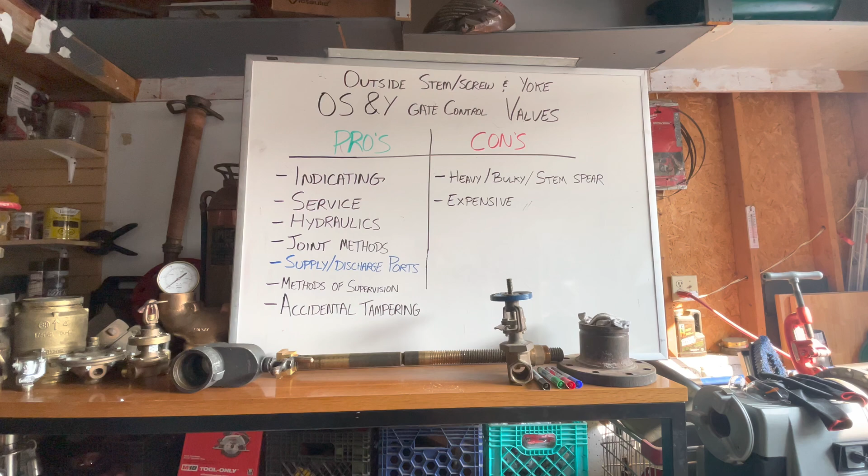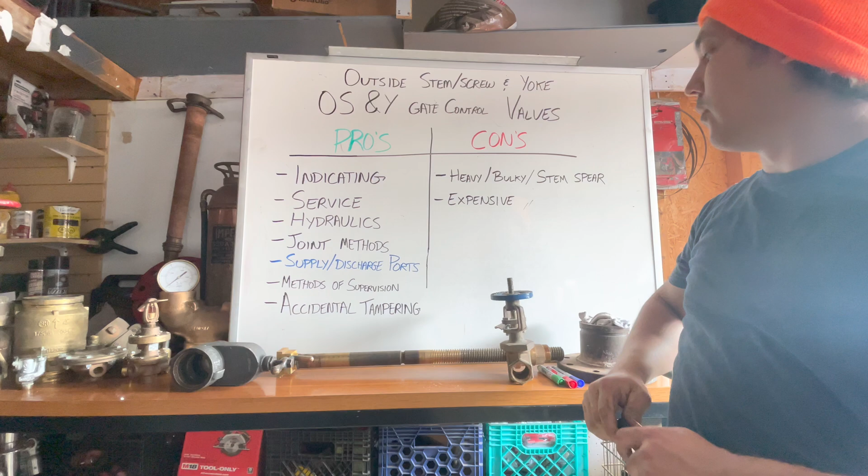So moving on, we're going to start talking about outside stem and yoke control valves. This falls under the category of a gate valve. This is a rising stem, outside screw and yoke, rising stem OS&Y gate valve.

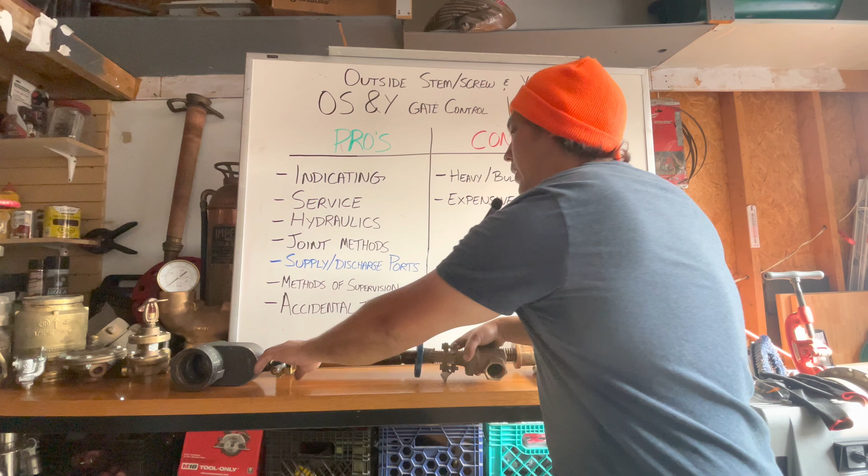And this would be a non-rising stem gate valve. So if it's not already obvious, on one of them the stem rises, and on the other one the stem stays put as it changes state.

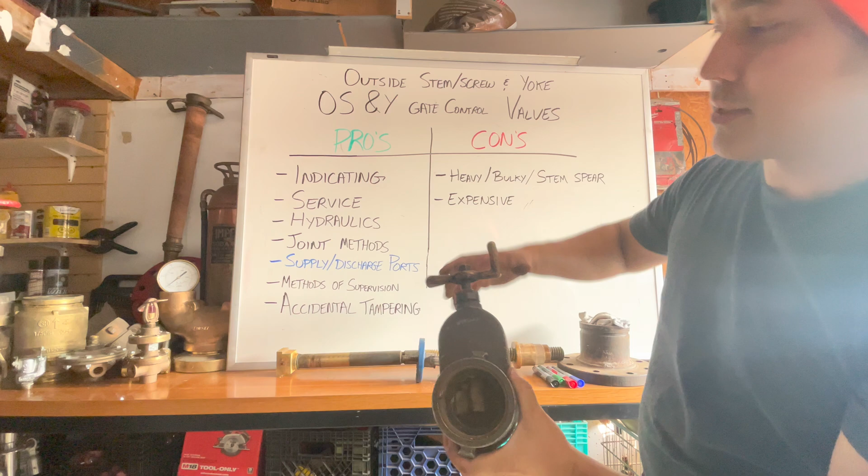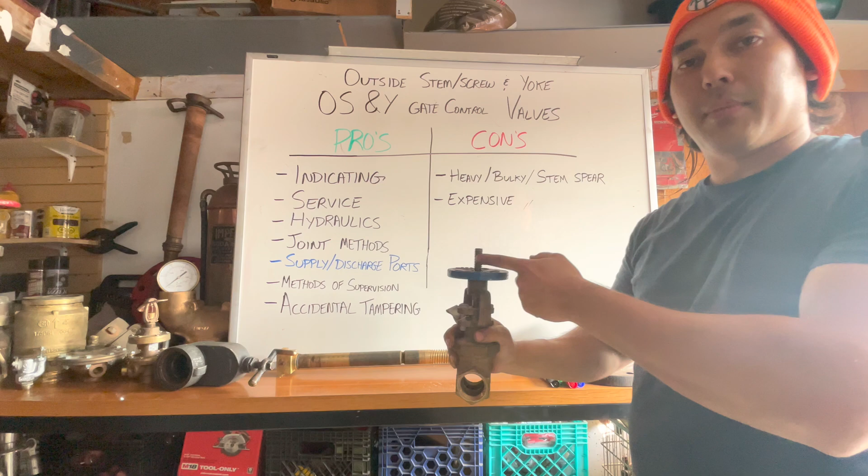I'll get onto the non-rising stem one next, but let's stick with this one for now. So one of the pros about this valve is it's indicating, and the stem is very much your indicator. You know when this valve is open, and you know at a glance when it's closed.

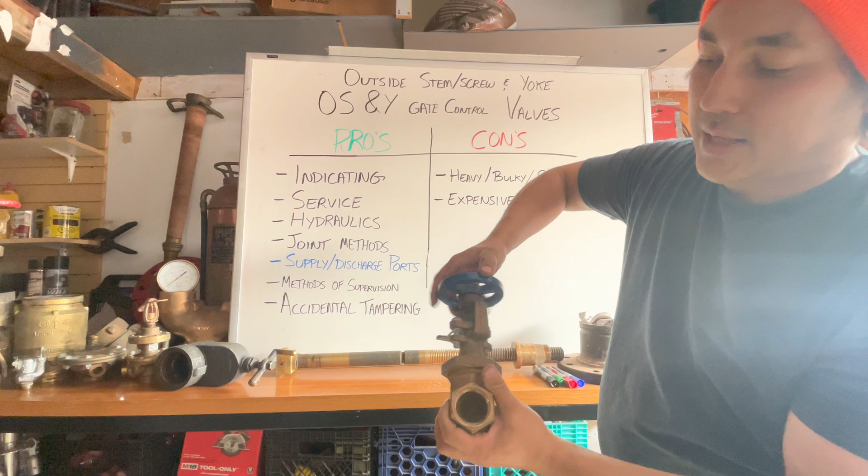When it's all the way closed, that disc comes down. I know just at a glance, I can look across the room and say, oh yeah, that OS&Y is closed right now.

So I know if it's on a sprinkler system, it better be open, unless they're using it for something like a test header. Another great pro about these is service. These are very serviceable valves.

You can take everything apart. You can service everything. You can order parts.

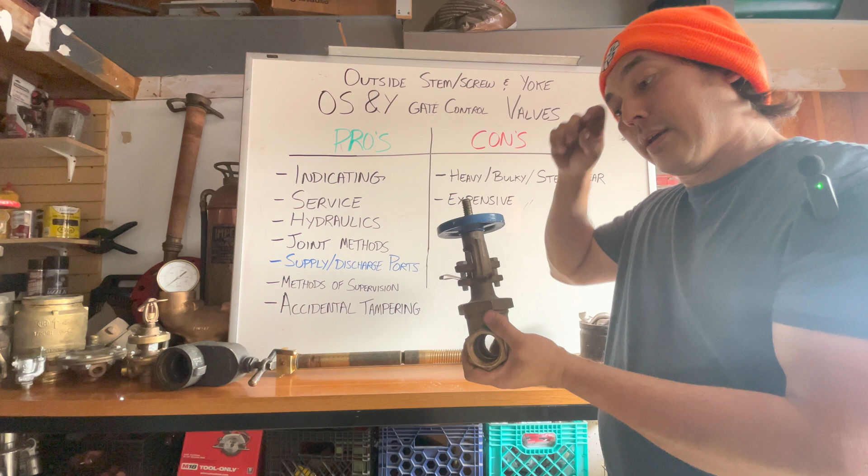So long as someone doesn't completely mash up the body and screw it up, you can take this apart and work on it. You can change the packing gland graphite or whatever you have to do if it starts leaking a little too much. Tighten her down.

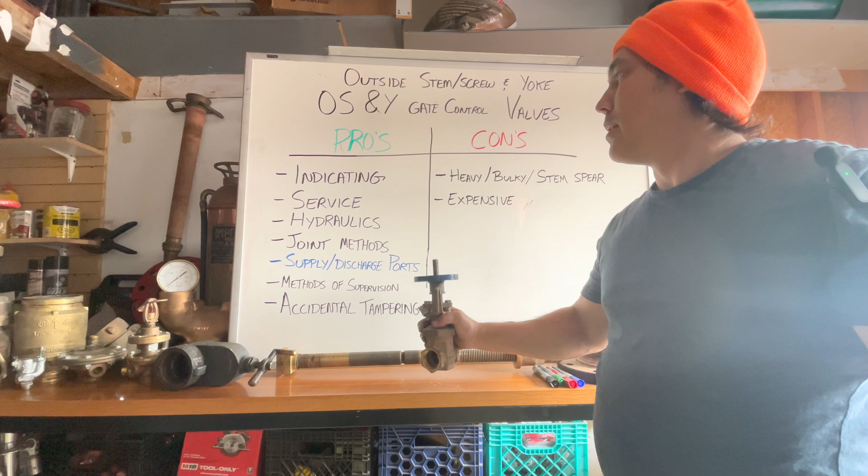They're great for service. Another good thing about them, if it's not already obvious from a wide open OS&Y, is that it's a full bore opening. So these have fantastic hydraulics, basically matched with ball valves for hydraulics.

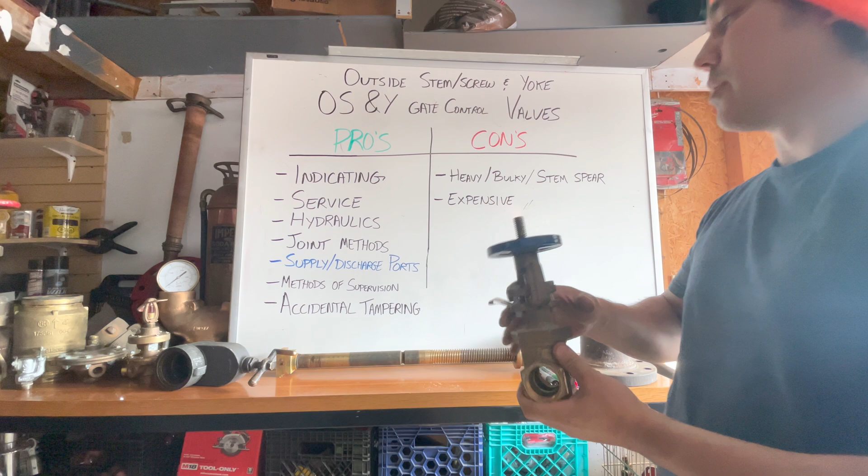Water goes straight through. Whenever you have a fire pump, this is very typical for what you'll see on the suction side, just because water is allowed to go right on through, doesn't cause any cavitation or anything like that.

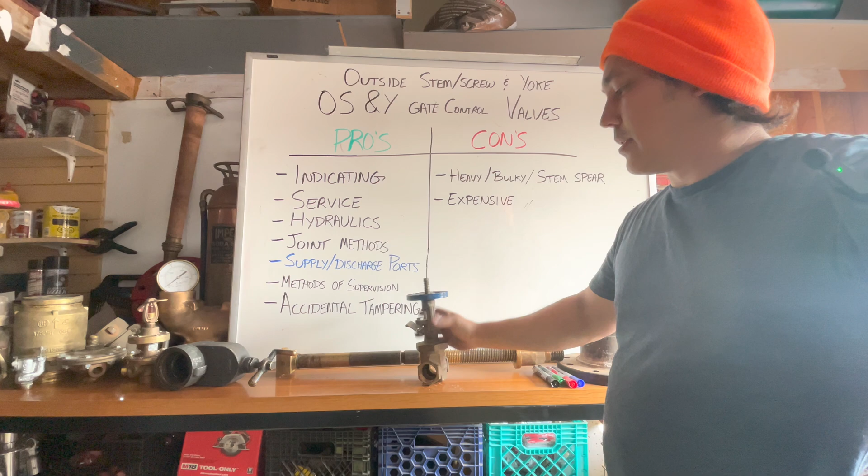Pros for joint methods, as you can see, this one's screwed. They do come in flanged as well. I'm not sure if they actually come in grooved, although I wouldn't be surprised.

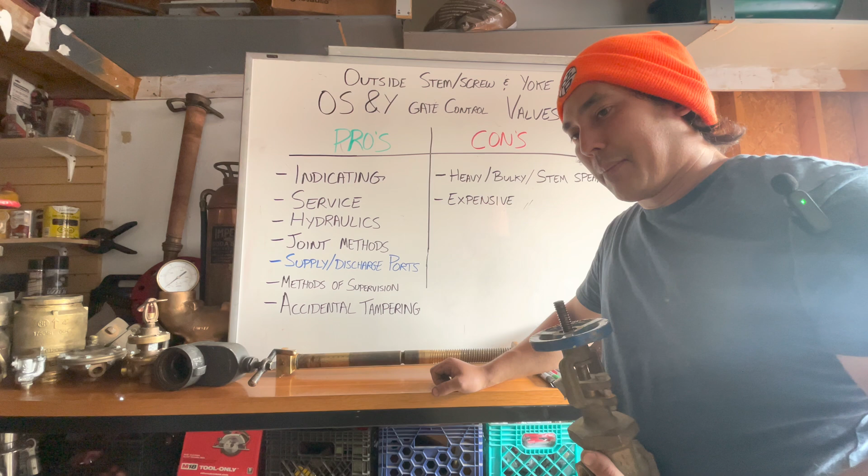I don't think I've ever installed a grooved OS&Y before, personally. I feel like if I were to see one, it would be on something like a backflow. So I actually don't know about that one, sorry, I should have done a little research on that. But there are multiple joint methods, so it's pretty decent for that.

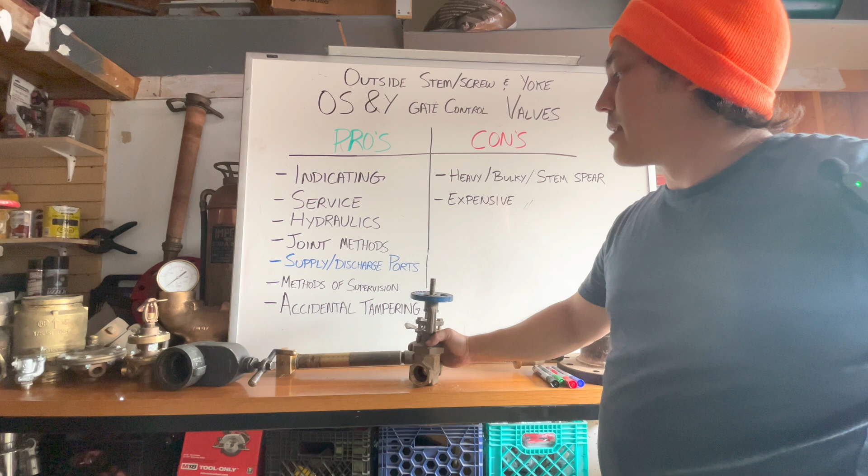I put it in blue, supply and discharge ports. This one doesn't have one, this is just 1.25 inches. I ripped this one off of a jockey pump inlet or outlet or something like that.

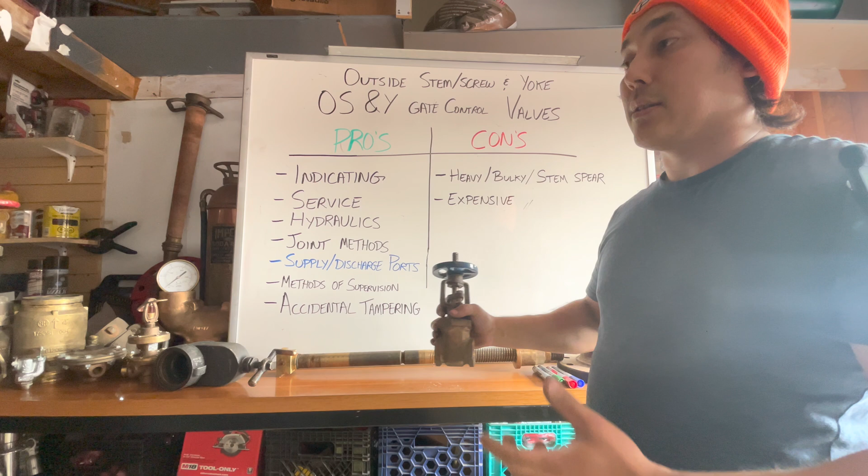But once you start getting into the larger pumps, larger OS&Ys, like 4-inch plus, maybe even 3-inch or 2.5, you could probably order them with a little 1/4-inch port or something. It is not uncommon to see ports on OS&Ys.

Which kind of puts us into that whole thing, for this one you can install it in any orientation, left or right. It's the exact same, it's identical. It doesn't matter which side's supply, which side's discharge.

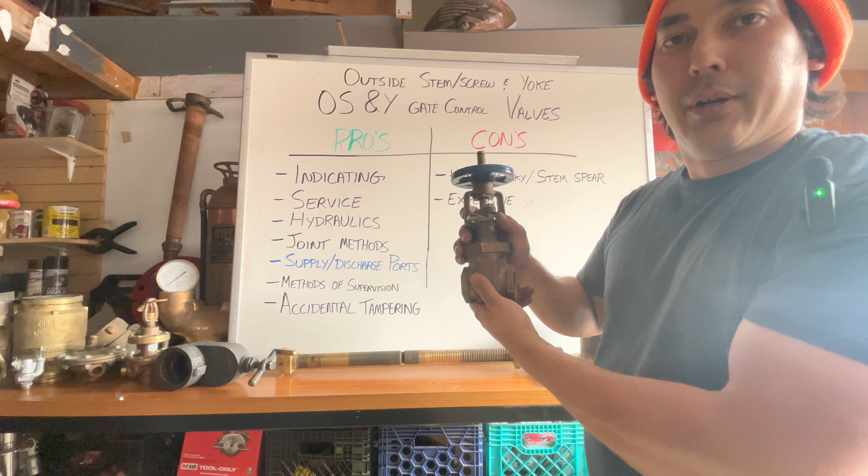However, once you start having ports involved, well, maybe you'd want to actually start installing them so that your port is on the supply side of a clapper.

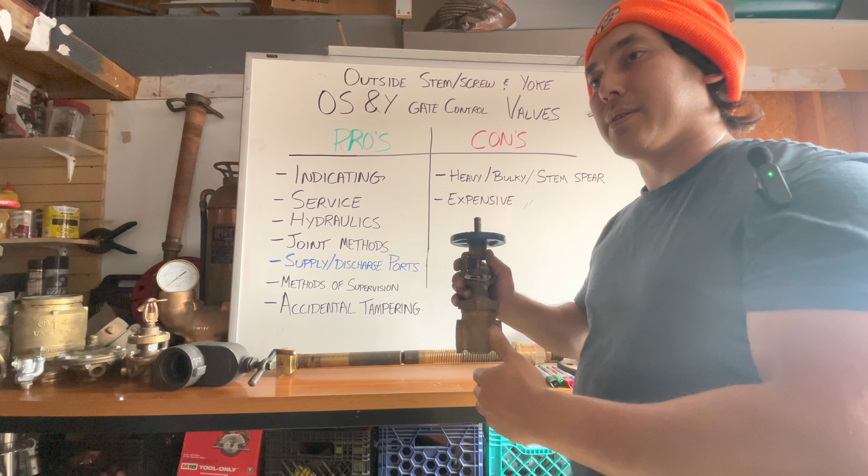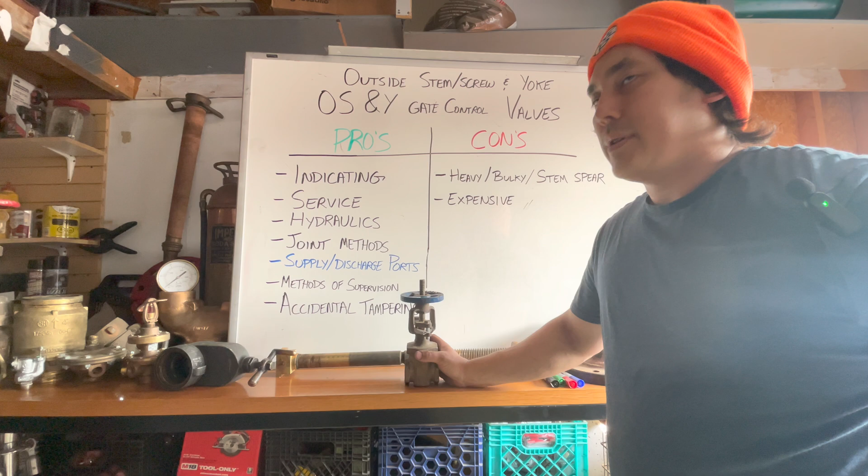So if this first OS&Y were the first valve coming into my building, like my... actually, let's not say that. Let's say we've got a backflow preventer first, and then this is my main feed shutoff valve.

So right after my backflow, they decided to add one more here, and this is probably, say for example, the feed going to the fire pump. If there is a 1-inch port, or maybe like 1.25-inch port, whatever, if there's a port on the supply side, we can use that now to feed our jockey pump.

Now we'd want to make sure that port's on the supply side. We wouldn't want it on the discharge side, because if I'm ever doing service to my fire pump and I close it, well, I've now killed that port, which is on the downstream side.

I've killed my jockey pump. So if I want to work on my fire pump, I now basically need to shut off my jockey pump in tandem with it, just because of how it was installed.

So when you have ports, it gives you a little bit of options, just a free opening, so you don't have to drill a mech tee on your supply piping or have your shop put in a weldolet or something like that. So just keep in mind, sometimes they do have them, and when they do, they're great, you can use them for stuff.

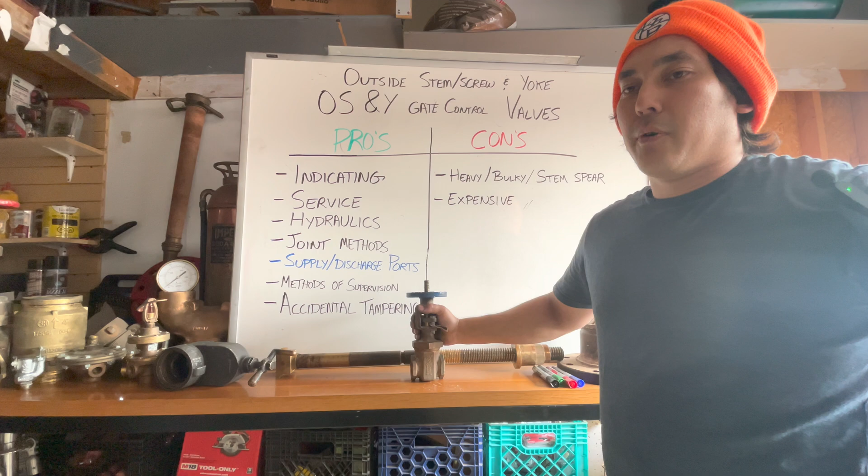Methods of supervision, not too many. The most common one you're going to see is what's called an OS&Y SU switch, made by Potter. Just like any other switch, it's just a normally open, normally closed contact.

That's all it is, it's just the switch changes state. What an OS&Y is, there's a bracket that just sits along the housing here, and this one does not have one.

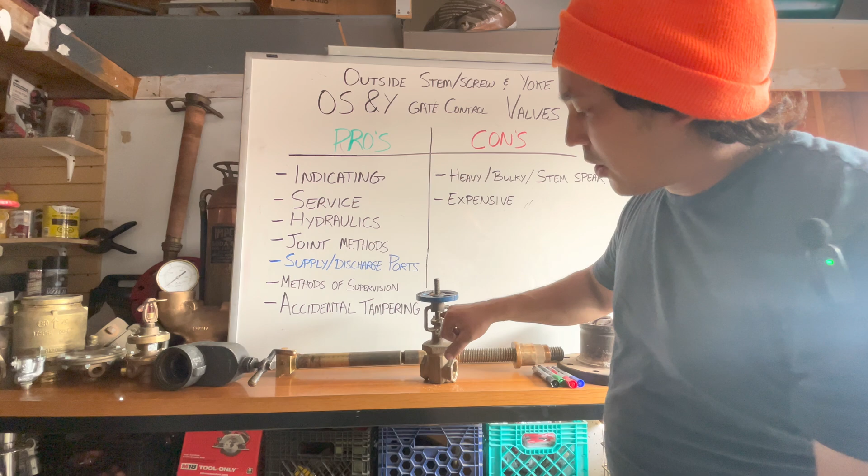More modern OS&Ys do have one, but along the stem there's going to be a little notch. Does this one have one? No, it does not. No, I lied. Okay, so I will just quickly draw it out.

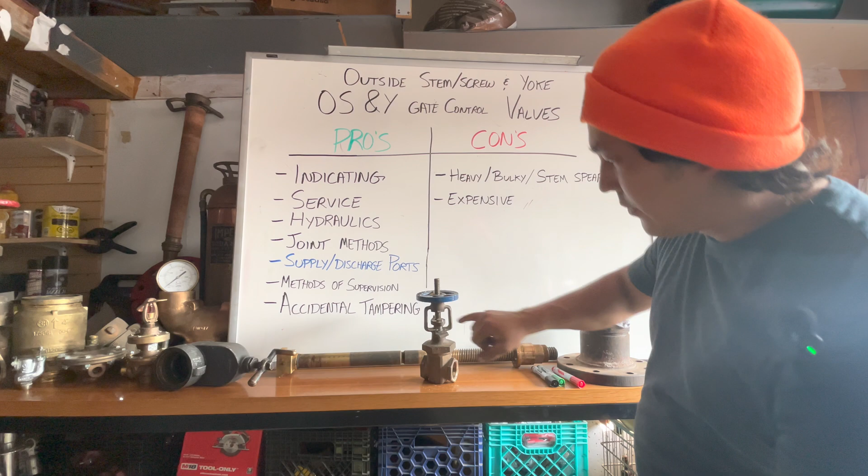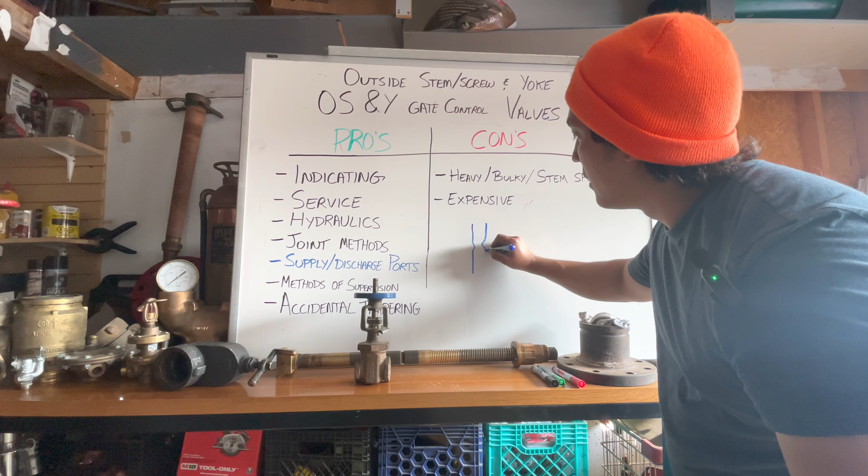On the smooth part of this stem, let's get this out of the way. I don't have yellow, let's pretend I can draw really well. On the smooth part of the stem, you will actually have a little notch, a little indent. On the more modern ones, it will kind of look like this. I'm going to emphasize it there. Now, they're supposed to be even, I'm sorry I didn't draw them perfect.

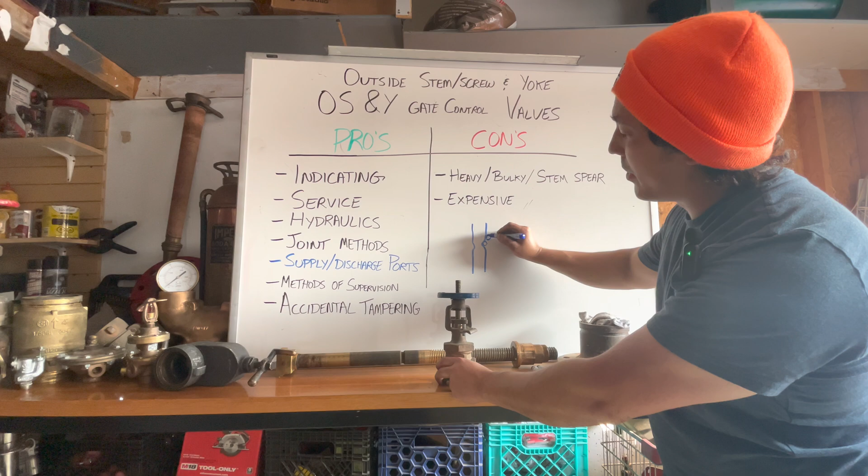But anyways, that OS&Y switch, the OS&Y SU-2, basically just has a little arm, a little pull lever, and it sits right in that notch. So as this valve changes state, as I start to close it, that stem is going to go down, and this notch will roll up onto the higher, bald part of the stem, and it will change the switch's state. So that's how the OS&Y SU-2 switches work.

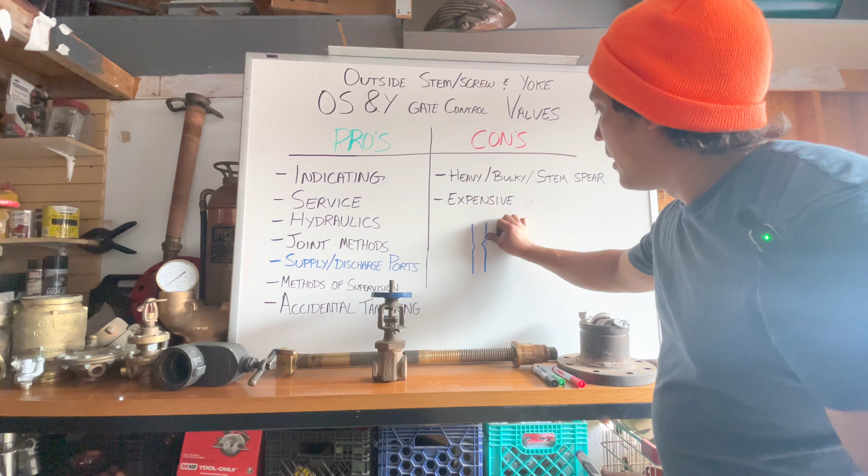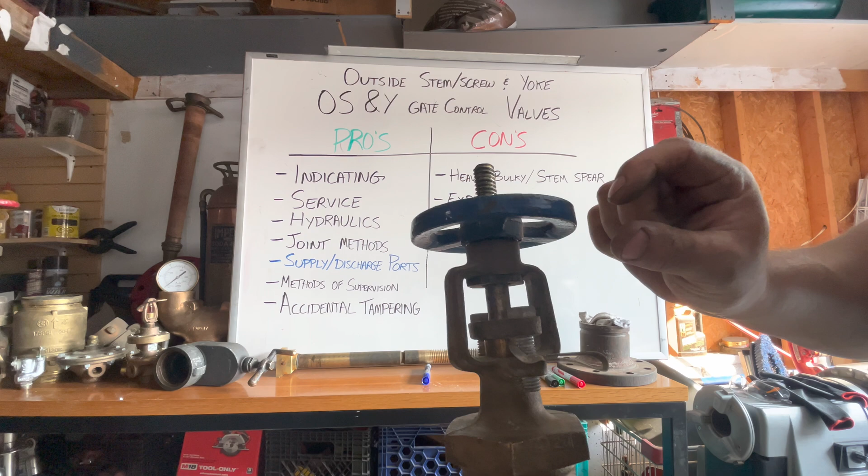If you do not have one and you need to put one in, this is worth noting, you have to use what's called a rat tail file. It's basically about a quarter inch in diameter, and before you start filing your stem, you obviously don't have too much meat, but you always want to file as high up as possible.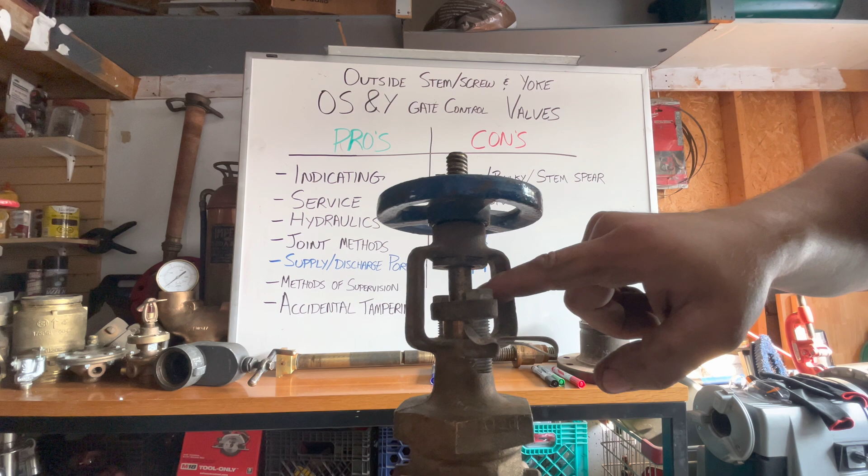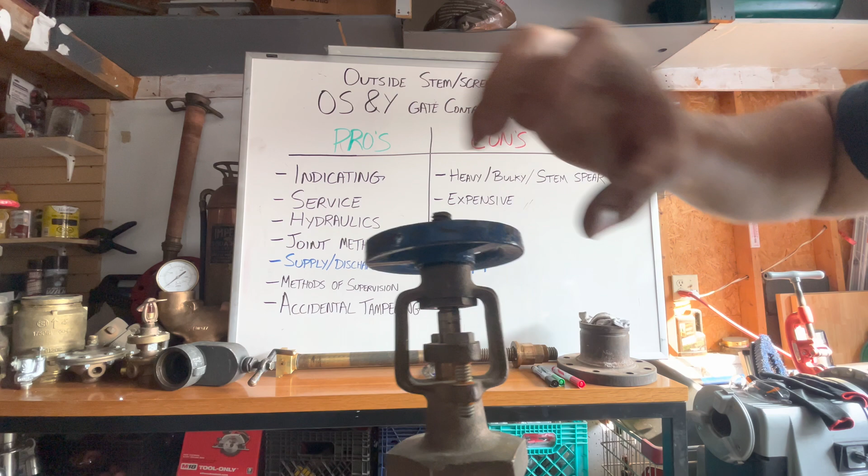Because as my OS&Y stem closes, that notch is going to go down into my packing gland down here, and it's going to start to chew up that packing, that graphite that I have down inside here, inside the bonnet. So the higher up that you put it, the less likely it is going to start to grab that graphite and damage your valve.

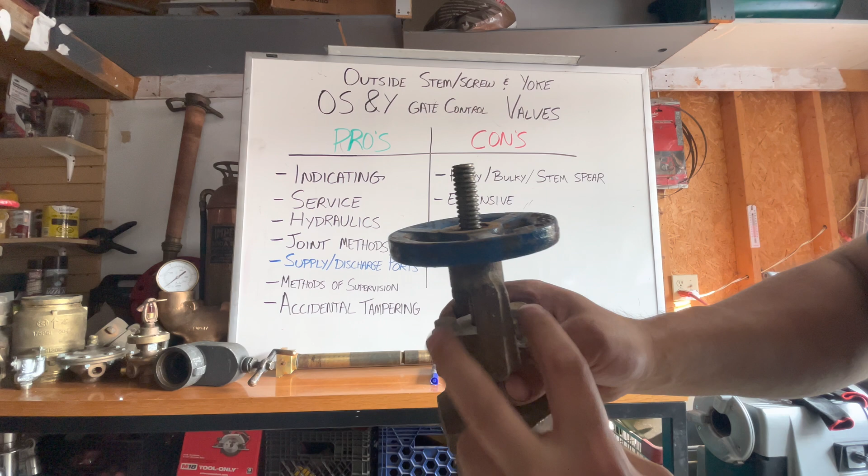And over time, this is actually probably a con I should put in there, they are prone to start leaking on the packing gland right here. So you can give them a little bit of a tighten on your packing gland nuts right here, and that might stop it.

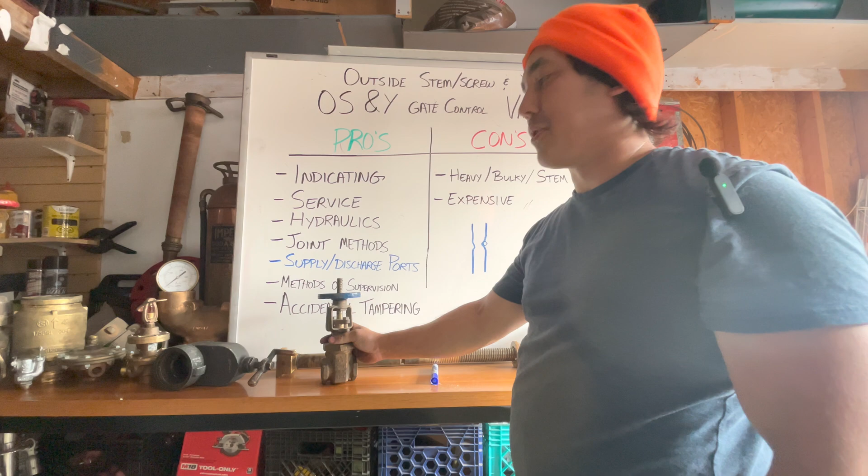You're going to have guys that reef on them, and then they're going to break them. And then, even though I said you could service them, most companies are just going to say, well, you broke your valve, let's just change the whole valve. So as much of a pro as it is for service, personally I don't think many companies really do service them. Maybe some do, but the one I work for doesn't, we just change the whole valve.

Not only that, it's just peace of mind, right? You get a whole brand new valve, and you know for sure right out of the manufacturer it's legit. So yeah, methods of supervision.

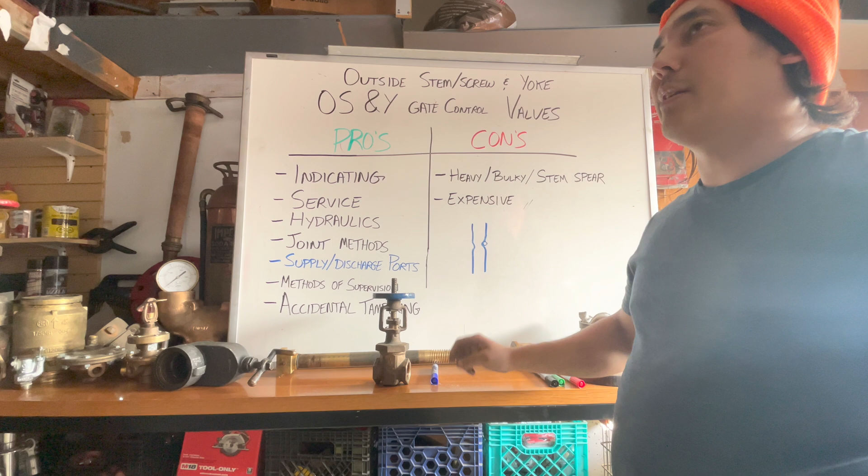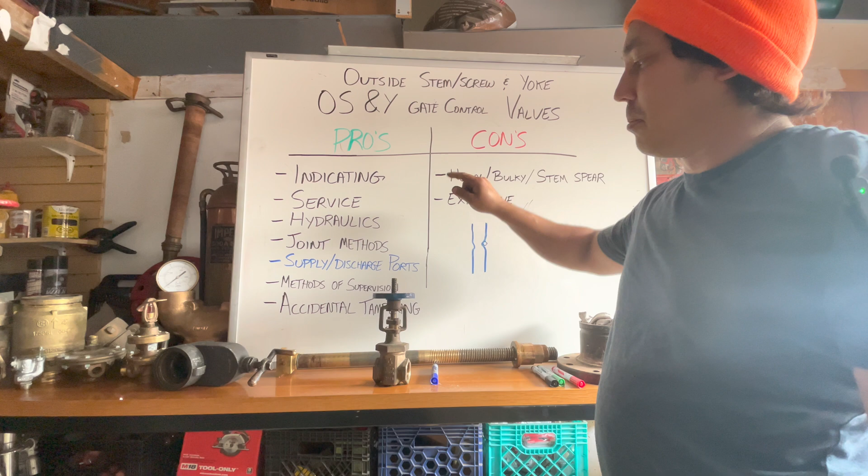The other one that you could put in is a PTS-C if you don't have enough room to get that in. And a PTS-C is kind of the most frowned upon style of supervision with Potter. But basically what it is, is just a switch that has a cord, a little plug-in cord. So you would have to make sure that switch is secured to something properly.

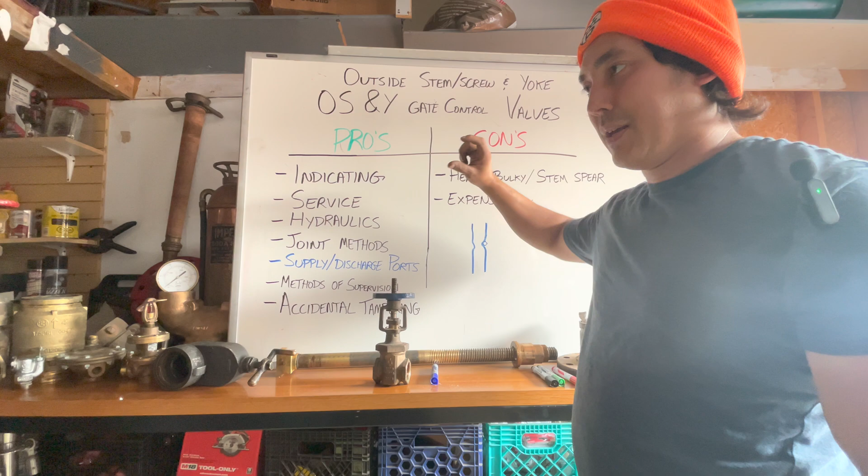I've seen them zip tied to rods or whatever. Zip ties don't cut it. On that bracket, there's actually a couple of holes. Make sure you get that screw anchored into concrete or something where you can't just easily take that off.

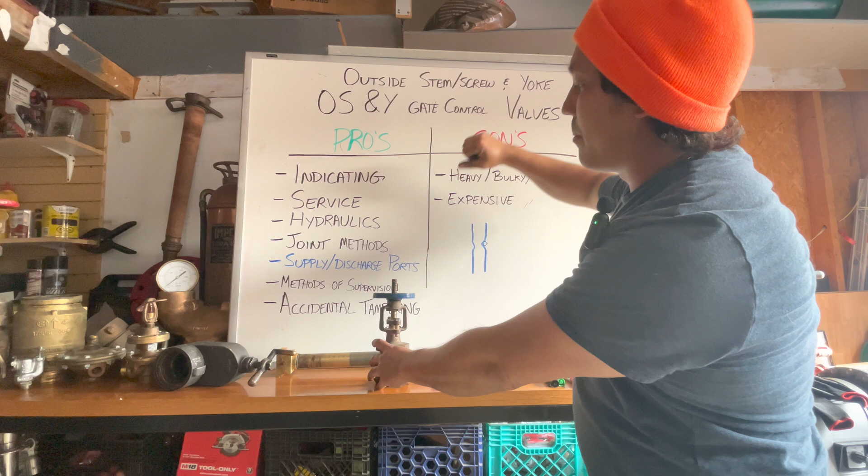And then the cord runs across. You want to make sure it's looped around the handle and it's tight, then you plug it back in. The point is, as you start to close the valve, that plug cord is wrapped around this handle, so that as you start to close it, it's just going to naturally want to pull out that plug.

And that plug is also electronically supervised. So if someone were to cut that cord, it's going to create an open condition, and they will still get a signal, so someone knows if you're tampering with them. But they're not really the most typical switch that you'll see, it's usually an OS&Y SU-2 by Potter.

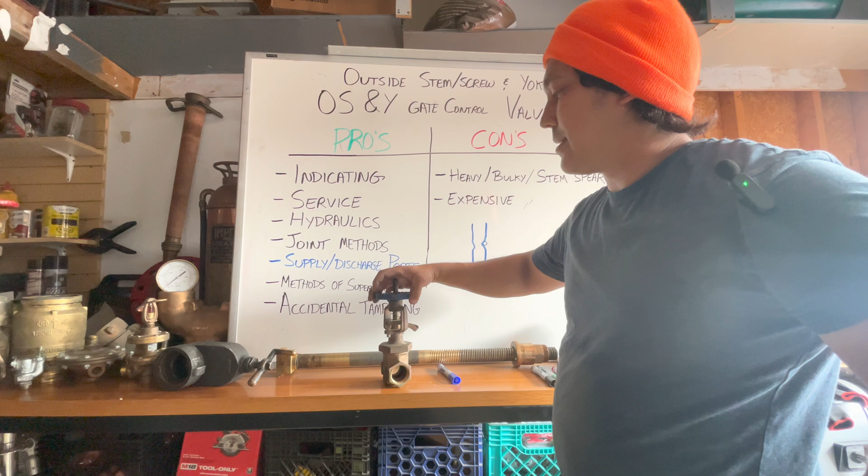I put under pro accidental tampering, and the only reason I say that is because as these valves get bigger, everything gets bigger. This is a 10-inch stem for a 10-inch valve, and the wheel is literally bigger than a steering wheel. So for someone to go in there and start turning it, it really does take a few turns before you really start to see that stem move.

So the reason I kind of put this into the pro category is it's not exactly the type of thing that you can brush past and accidentally bump it. And they're not quite as buttery either.

I'm not saying all of them aren't—some of them are really nice and smooth. But unlike a butterfly valve we just talked about, there's a little bit of resistance, a little bit of torsion, I guess you could say. So yeah, they're a little bit less prone to accidentally causing that tamper supervisory to go off.

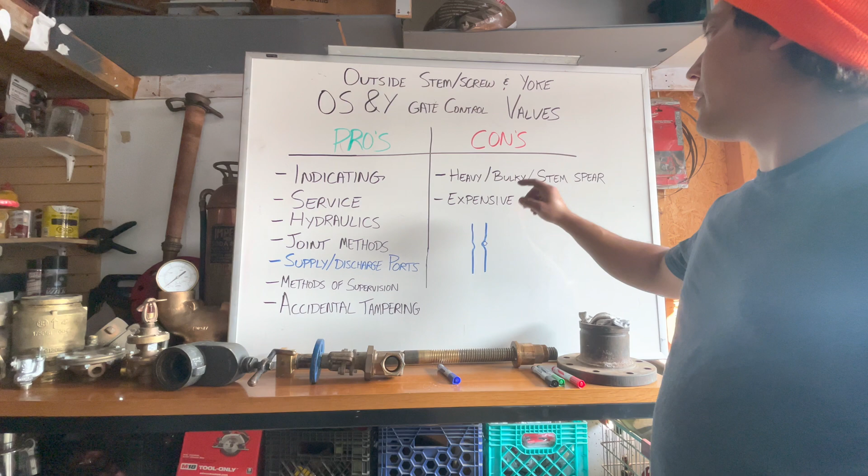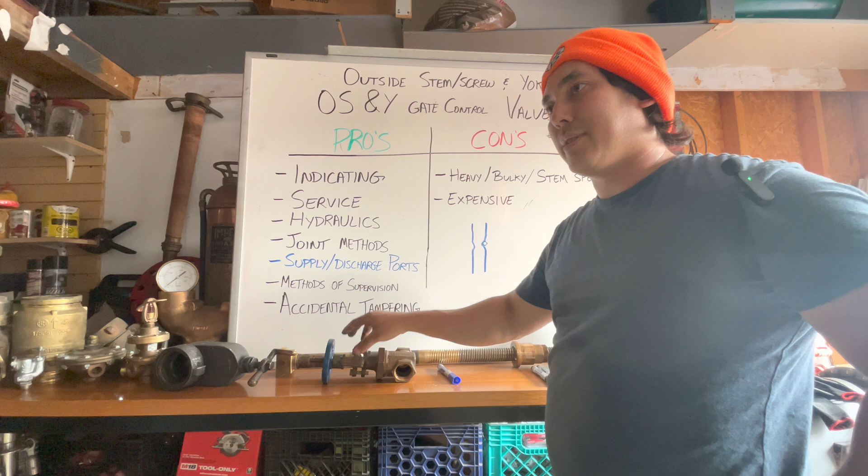So some of the cons: they are heavy, they are bulky, and the stem can be a spear. Obviously this is just a little 1.25 inch one, but as they get bigger, they get big, and they take up a lot of real estate. Unlike a butterfly, you can have a 4-inch butterfly that's no bigger than what's in my hand—I can easily carry it one-handed.

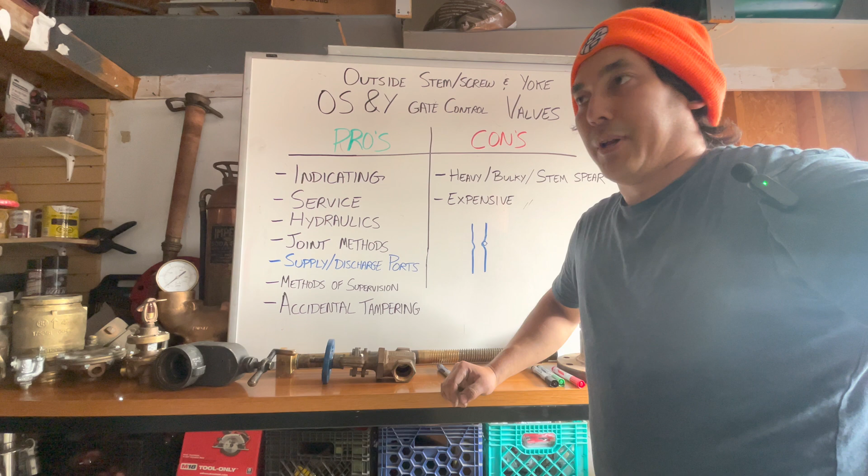Once you get a 4-inch OS&Y, that's a bit of a two-hander. You've got to carry the body over here—it takes up a couple feet of space. Once you start getting into those 10-inch guys, I don't even know how heavy they are, I think they're well over 200 pounds. If you're putting them up anywhere, you basically need chain falls to get them in there. It's a two-man job sometimes.

Oh, there is a notch on this—how silly of me, there's a notch right here. There's that notch I was talking about. So that toggle goes in here. As that valve changes state, it actually goes this way—that's the disc side. So as that changes states, it just knocks on the switch, and the pull moves up right here. Why didn't I see that? So silly of me. Anyways, that's that.

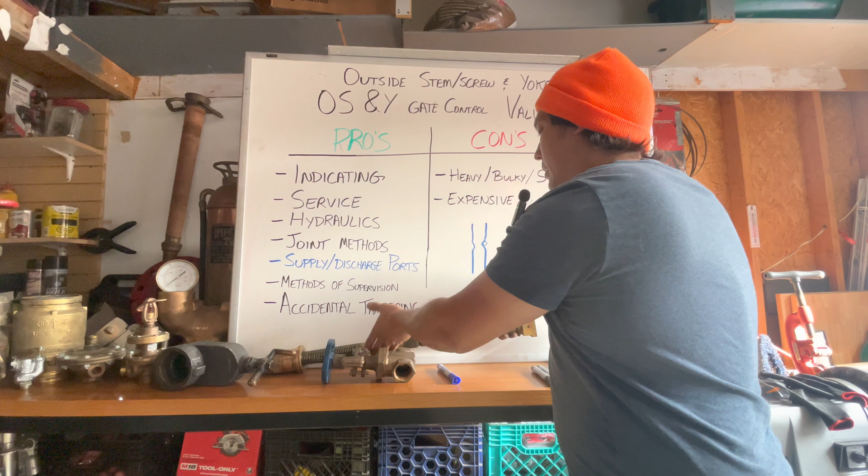Yeah, oh yeah, so this is what I mean—that's the 10-inch stem. I think this thing weighs close to 20 pounds. This is a nice, sweet piece of brass right here, but I just like it, it looks really cool. And this is what I mean by it's a stem spear.

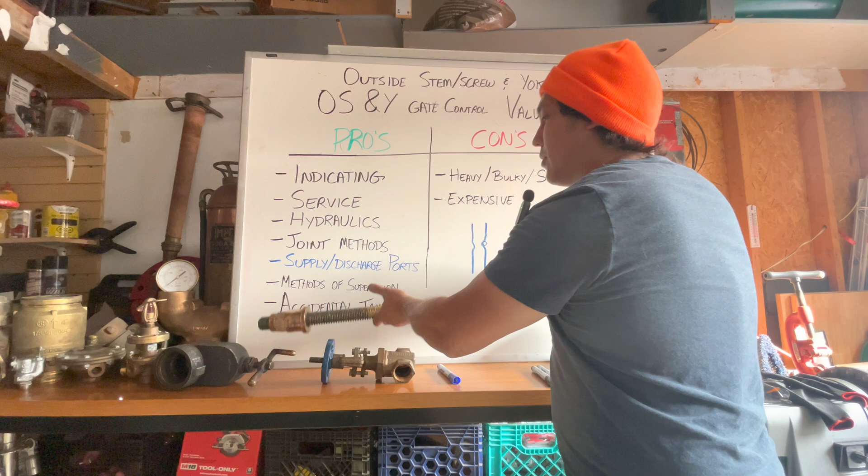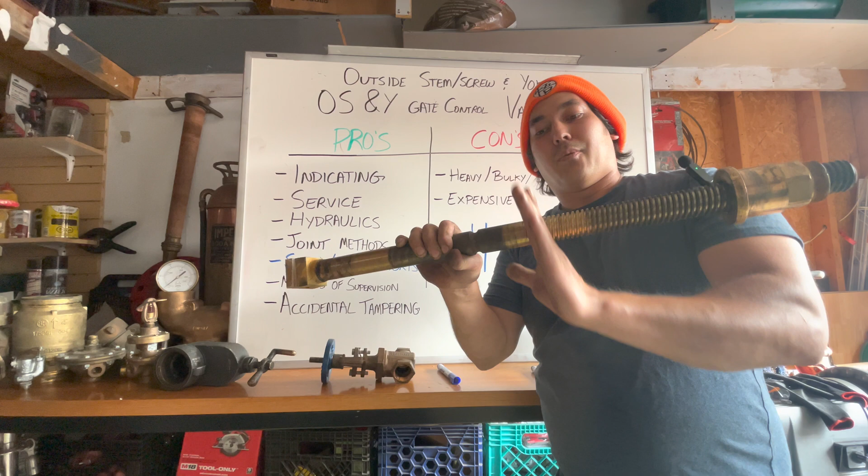So when this is normally open, this thing is sticking out of the valve like 14 inches, right? My valve handle's typically right here where the threads stop. Maybe not 14, call it 12 inches. But it's not uncommon—I'm sure anyone who's been in the trade will tell you they have accidentally walked into OS&Y stems and speared themselves, and it's not cool.

So it's not uncommon—guys will put tennis balls on the end, or put a little bit of red tape on it, like caution tape or something, just so you know it's there. The last con I could kind of think of on the fly is that they are expensive, right?

The cost of a 4-inch OS&Y in comparison to a 4-inch butterfly, I actually don't know exactly what it is, to be honest—I've never personally purchased one, but I do know for a fact that they are much more expensive. So when it comes down to quoting jobs, unless there's a spec that says all valves shall be OS&Y style, every company, because they're all competing and bidding, they're always going to go with the cheapest method.

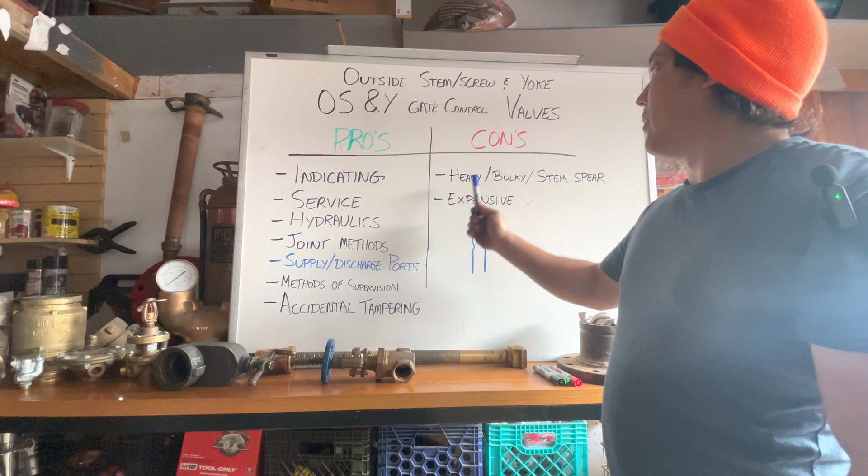Typically on fire pumps is where you're for sure going to see one, but after that, everyone's going to say, alright, let's go get those butterflies—they're the cheapest ones, quick to install, right? That's the other thing. So I guess I could add time of installation as a con. They're so much bulkier, they take a little bit longer to install than just a grooved 4-inch butterfly. So a few things like that.

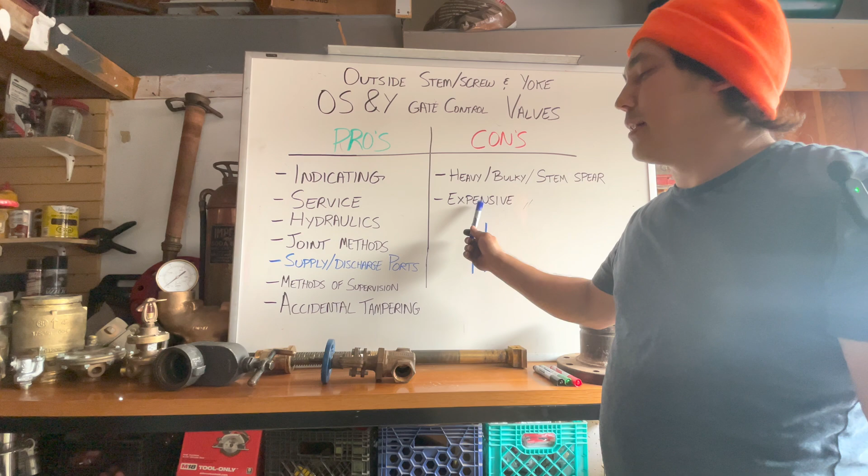These are, like I said, just kind of the obvious things. I wanted to pick out the biggest things that really stand out. But as installers, I kind of like to—I don't like, but I try to avoid costs. As fitters, if you're going to own a company, absolutely, that's something you want to know.

But as a fitter, you should always try to think of what is best for the system, what is best for the customer, what is best for your pump—what's going to protect. We care about doing the right thing. Money—you should always try to tackle jobs as if money is not an option. That's how you should think, and you're going to start to keep that mindset.

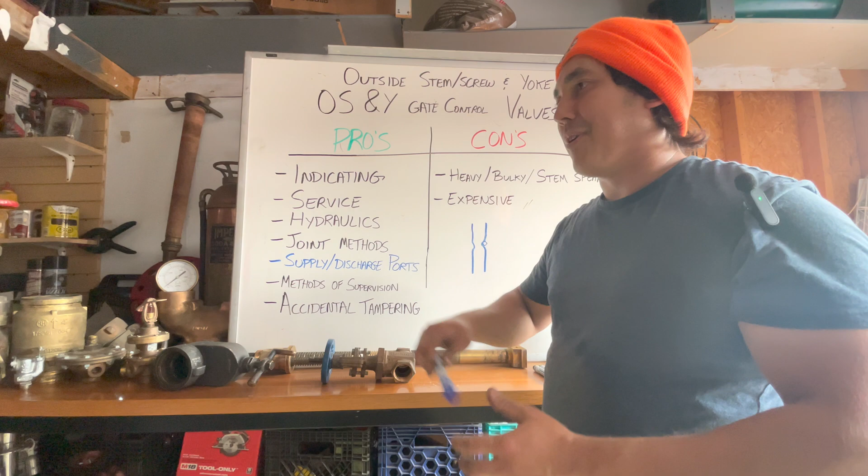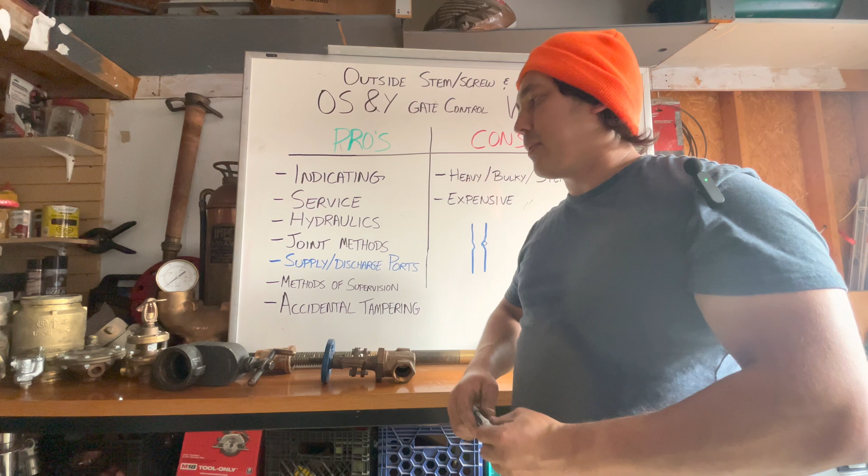Just like hydraulics—people don't really care about hydraulics, but you as a fitter need to be conscientious of that. You don't want to see spider webs of pipe going all left and right. This looks greasy, right—someone's installing something and being lazy when their reaming and running drops or whatever. So take some pride in your work. We all want to do the right thing.

So that more or less covers it for OS&Ys. And I think we're going to start jumping into IS&Ys, or non-rising stems.